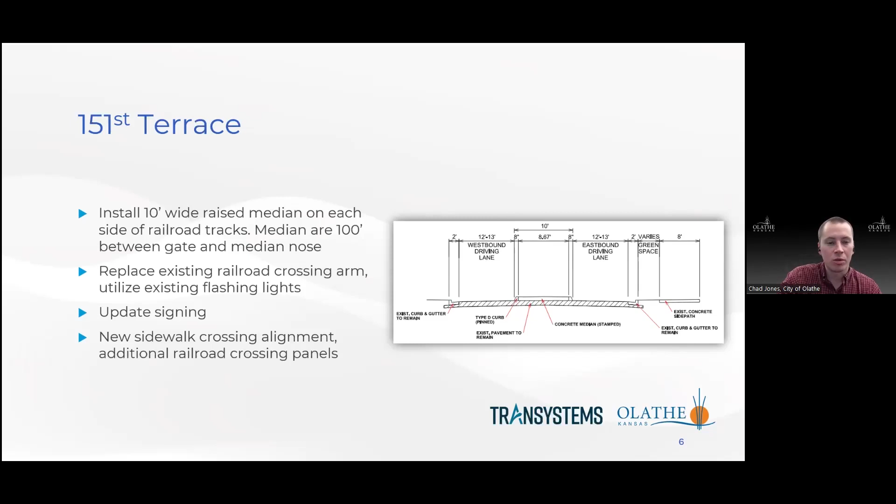Here's another section view of the roadway at this area on 151st Terrace. You can see that we're just adding that 10-foot median at the center line of that roadway where that striped median currently is. This area has that bungalow area with the flashing lights that will remain in place. So the median and crossing arms are the only updates at this area to implement the quiet zone.

Moving further south at 159th Street, we'll again be utilizing the raised median safety measure for this quiet zone. On the west side of the tracks here, we already have a raised median, so we only need to add and install that median on the east side of the tracks. As part of this, we'll also have to remove a commercial drive entrance, kind of you see there at the southeast area of that crossing. This is necessary to restrict traffic in this area per FRA guidelines.

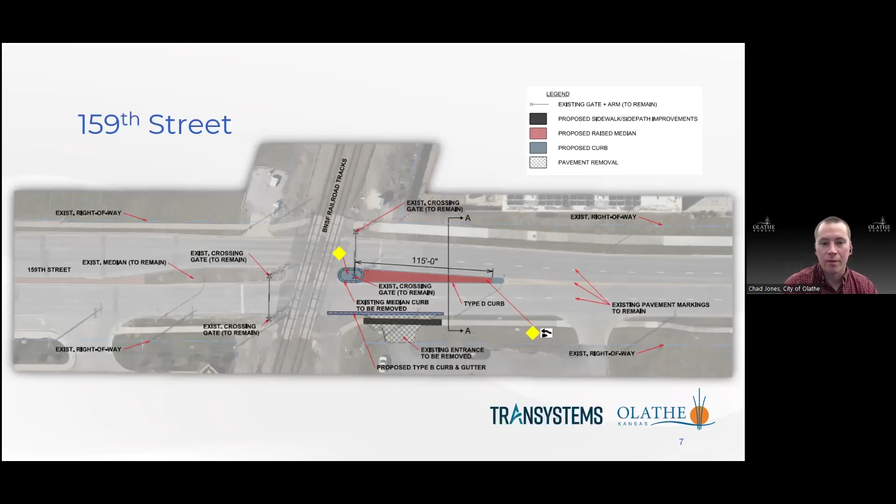Here's the section view of that area. It's a wider street here, but again, we have an existing striped median, so no widening of the roadway is going to be required. We can install that raised median on top of the existing striped median. The existing crossing arms here will also remain in place.

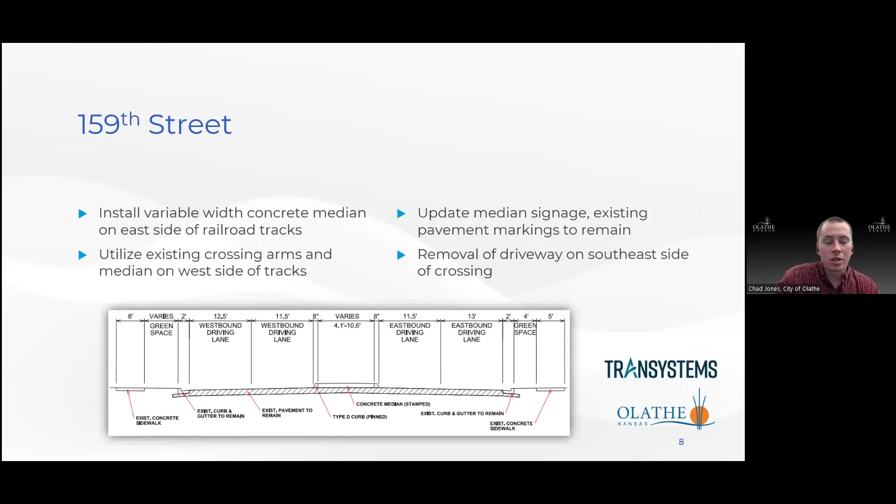Looking forward at next steps. Currently, this project was in the conceptual phase of design. So working with TranSystems, what we had done is gone through the guidelines that Matt outlined that the FRA has and selected cost-effective and minimal impact to the existing crossings for each crossing that will be included in this quiet zone. So we're currently in the process of allocating funding moving forward for final engineering and construction plans. So we're undergoing that budget process now, and we can update everyone as that budget is finalized later this year.

Part of what TranSystems will be assisting us with is also pursuing grant funding and cost sharing through BNSF and KDOT. We'll be submitting those applications later this year and early in 2025 to try to secure some funding to help pay for this project.

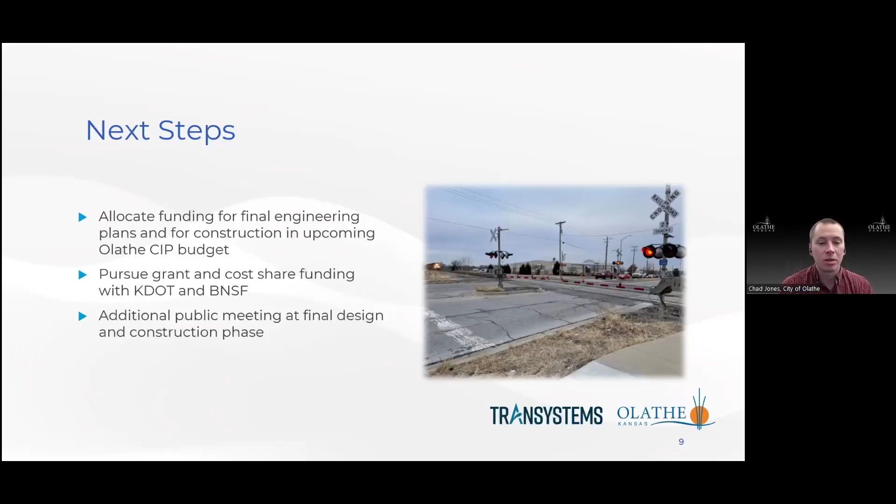And then once we have that funding in place, have a designer on board to develop the final plans, we will have additional public meetings to talk about any changes to the concepts we've presented here tonight, what this may look like from an impact to traffic standpoint during construction. And if we have a contractor on board at that time, we'll also be introducing them as well so that their contact info can be shared as we get into construction, that they can be reached for questions.

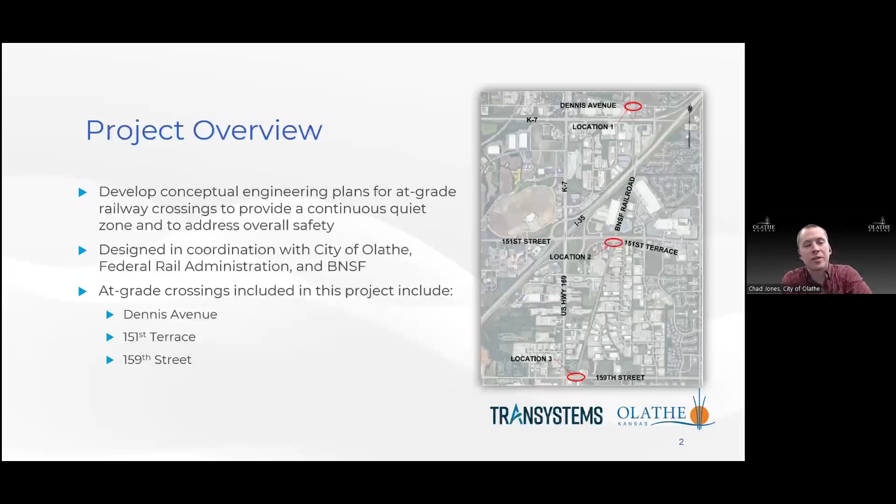Thank you, Matt. Yeah, so working within those confines, the overall goal of this project at this time was to develop conceptual plans for each crossing. So at this time, we don't have any construction plans or a contractor on board to construct them. But we did identify the crossings that will be included with this, and concepts that will help make this area a quiet zone. Those crossings are at Dennis Avenue, 151st Terrace, and 159th Street.

Here you can see an exhibit of the planned modifications at the Dennis Avenue BNSF crossing, both the main tracks and the spur. That spur did create some challenges as we were working through the concepts here, as the raised median would not work here, as it would have restricted access to Keeler Street, which is not something that we were interested in doing. So we did land on implementing the 4-quadrant gate system here to meet the FRA's requirements for a quiet zone.

Doing so allowed us to use the 4 existing gates and install 4 new ones. As part of that, we would require the additional signage that Matt had mentioned, new pavement markings, and sidewalk crossing panels, and a slightly realigned sidewalk there at the north side of Dennis, where it crosses the spur tracks.

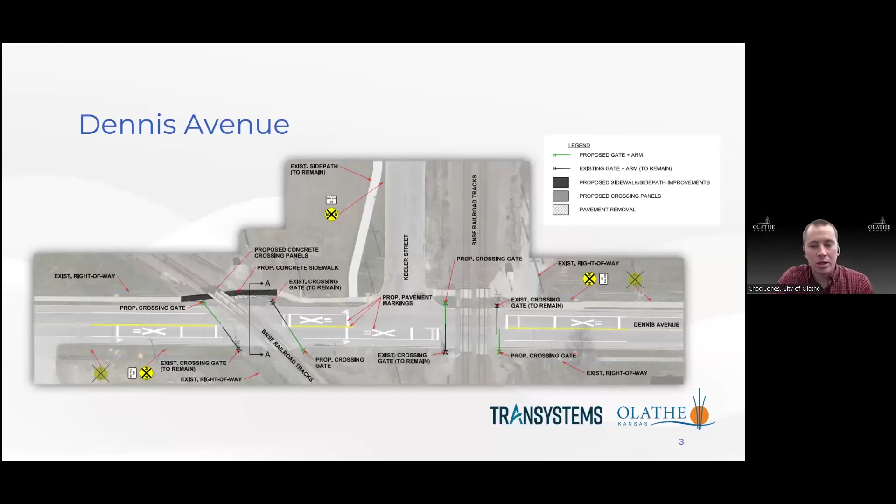Here you can see a cross section of what that street will look like. Utilizing no median and using the 4-quadrant gate allowed us to not have to modify the width of Dennis Avenue. And again, the only modifications to this existing infrastructure will be the crossing panels and that small section of sidewalk that crosses that rail spur.

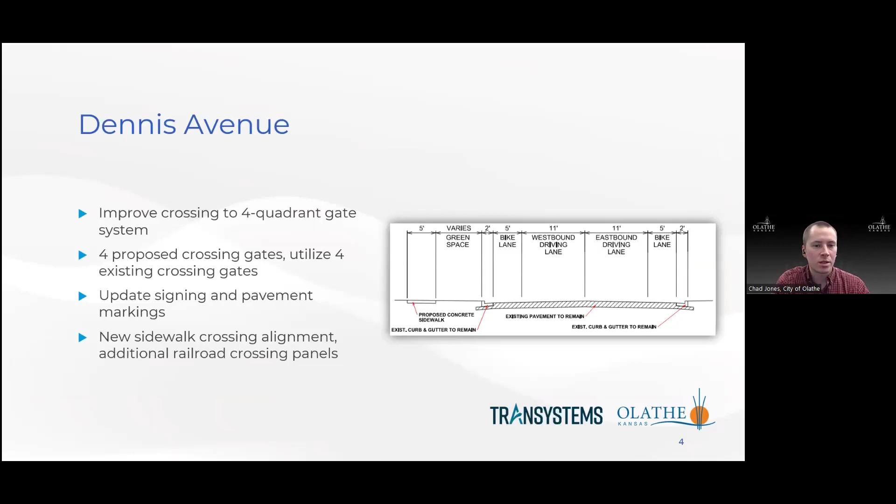Here's a concept that we've developed for 151st Terrace. Here we went with the 2 gate arms and raised median. This made sense at this location as there's already a striped median on the pavement, so we won't have to widen the roadway or anything like that to install this median. We simply construct 10-foot median on top of the existing stripe median.

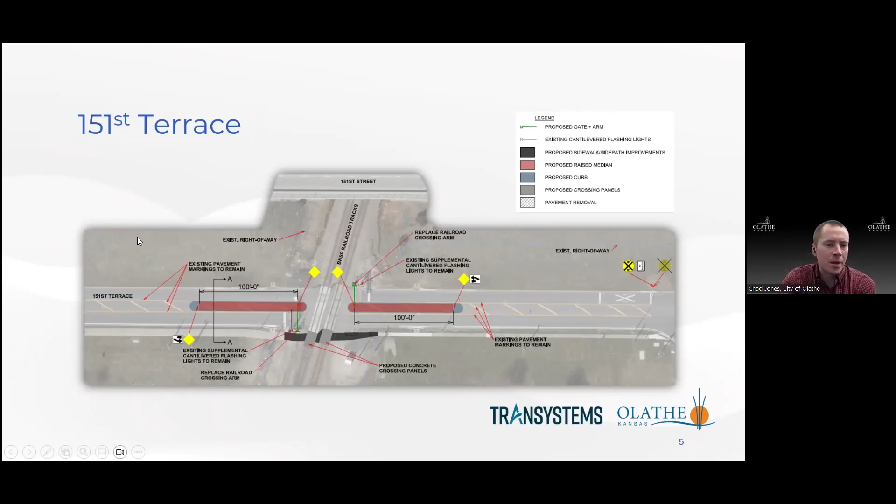Part of this will include new signage, and similar to Dennis, the new sidewalk crossing panels on the south side of 151st Terrace. This location also has the cantilevers with the flashing lights. Those will remain and won't be impacted by implementing these medians for the quiet zone at this location.

Here again is a cross section of the roadway and a description of these improvements. As you can see, the roadway width is not going to be impacted, and we can simply install that median on top of the pavement.

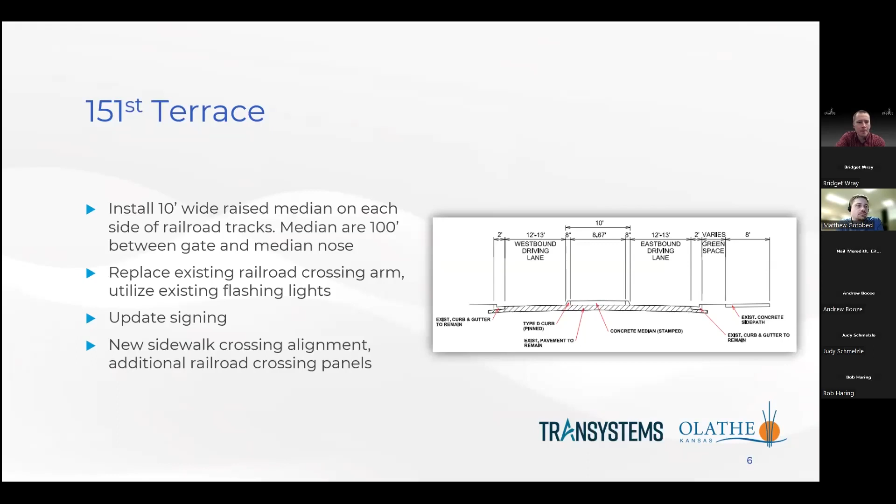Here's the exhibit for the concept we have for the crossing at 159th Street. Again, we've gone with the raised median concept here. This made sense at this location as the west side of this crossing has an existing raised median. So we just need to install that 115-foot median on the east side of the tracks.

Similar to 151st Terrace, it is already striped with the median, so we don't need to modify the width of the existing roadway, and we can install that median on top of that existing striped area. Part of this location will require us to remove a commercial drive entrance. You can see that there on the southeast side of that crossing. Restricting that access is a requirement to implement the quiet zone in this area.

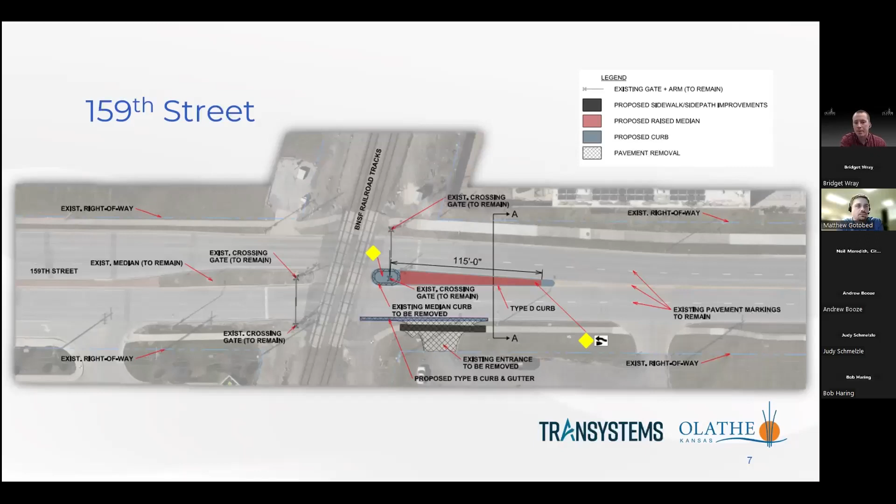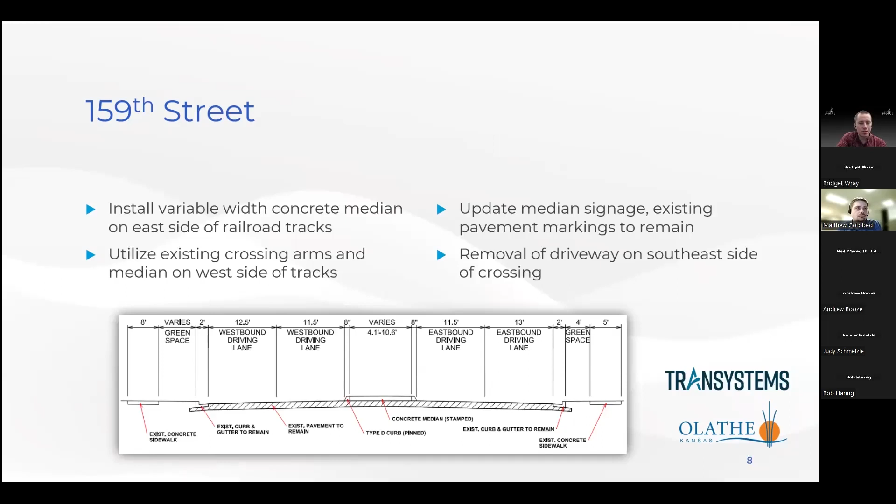Here again is a description of the improvements and what we will be utilizing that's existing and what we'll be installing. And again, you can see that roadway stays the same. We just install that median at the center line there.

Next steps for this project, as I mentioned at the beginning, this is currently in the conceptual phase. We are working on allocating funding for final engineering plans and construction plans, and our budget, which is being undertaken right now. Part of that process is going to include pursuing grant and cost share funding through BNSF and KDOT. And Bridget, if you could speak a little more to that, I know TranSystems is going to assist us with those grant and cost share applications to look at securing some of that funding.

Sure. So the Kansas Department of Transportation has a biannual cost share. They release a cost share application in the spring and in the fall, and we plan to apply for the fall application. And this is a construction reimbursement program, so we'll be able to receive reimbursement on construction costs only. We're also considering going after some federal grant money, but we feel most confident with our KDOT cost share.

And I'll note that if you support this project, please put that in the chat. That always looks great on grant applications. Thank you, Bridget.

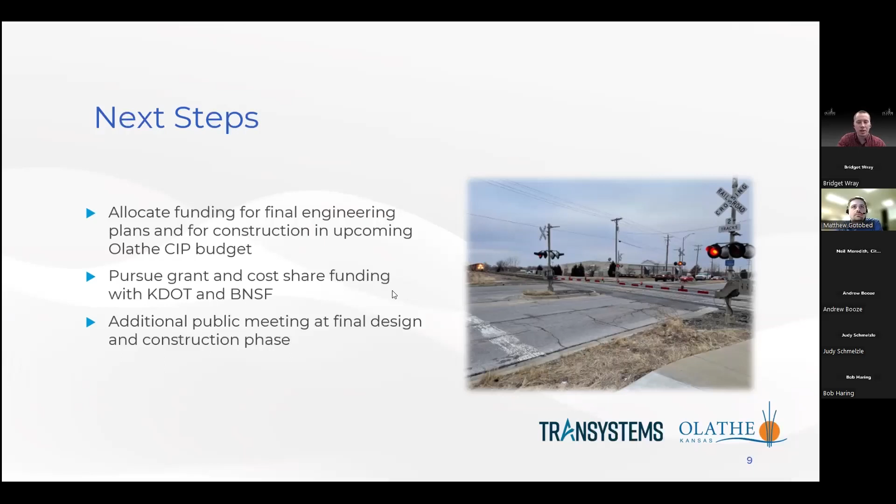So as we've talked about, we don't have any pending plans to put this into construction. However, once we do get that funding secured, we have construction plans and a contractor on board, we will have an additional public meeting to talk about what those final plans may have changed from these concepts and how the impacts during construction can be expected to affect motorists and anyone driving through this area.